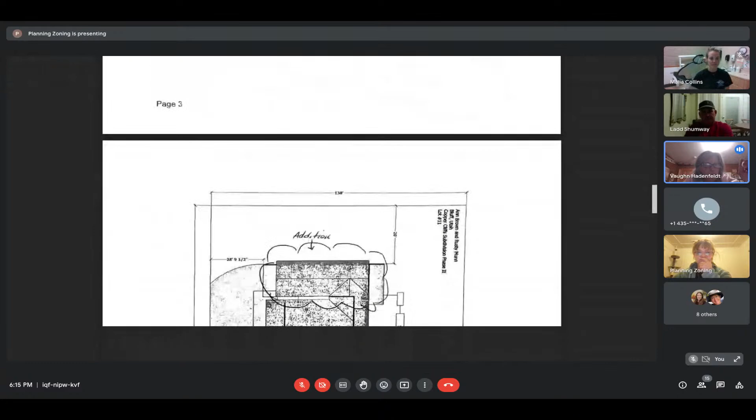Would you slide down to the drawing where the setbacks are? So there. Everything looks fine in terms of setbacks, except I'm confused by the double line of the outline of the property. Can you see that? It kind of looks like one was laid on top of the other.

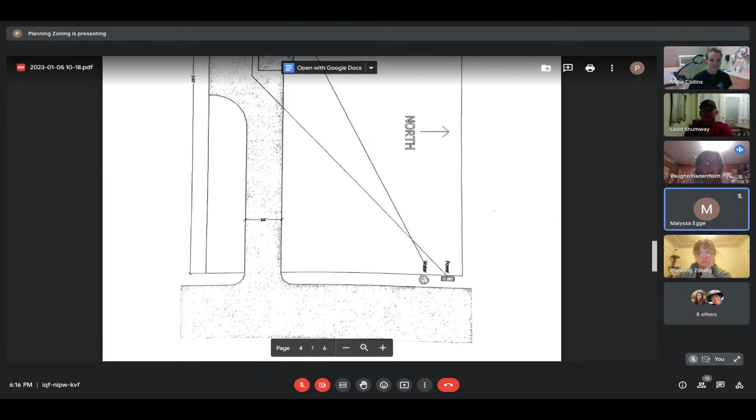Could you go down just a pinch, Amanda? Does it go all the way to the bottom? So Marcia, I'm wondering if those are just the measurement lines and not a double line of property. Are we looking at the same thing? I think so. Go up to.

You mean like this? Yeah, see how there's an overlap of the square? Am I looking at measurements or two drawings of the lot line? It just got confusing.

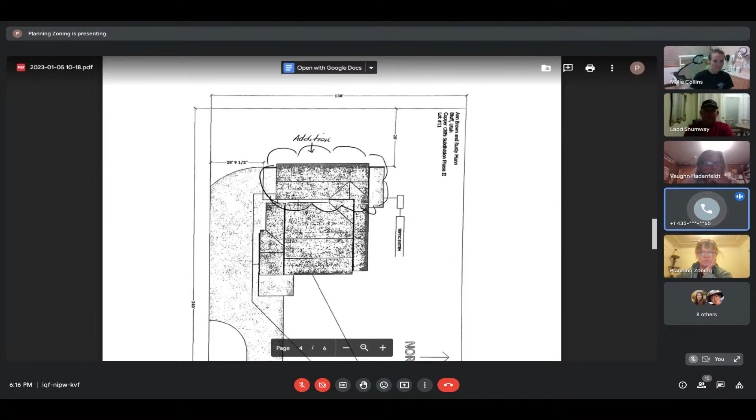It may be a line for measurements on that. The home sits within, on the south end, about 12 feet from where the existing home sits, and so it clears the property line there. On the west side, I'm within 20 feet from the property line. On the north side, we extend out 8 feet from the existing home, but we're still well within the 20 feet to the property line on the north.

Okay, yeah Marcia, I think those double lines are showing the measurements. Okay, like I said, I just got confused why one is sitting on top of the other. I do agree, Mr. Munson, that I believe you fit all the setbacks. I just got confused by the line. So we can move on.

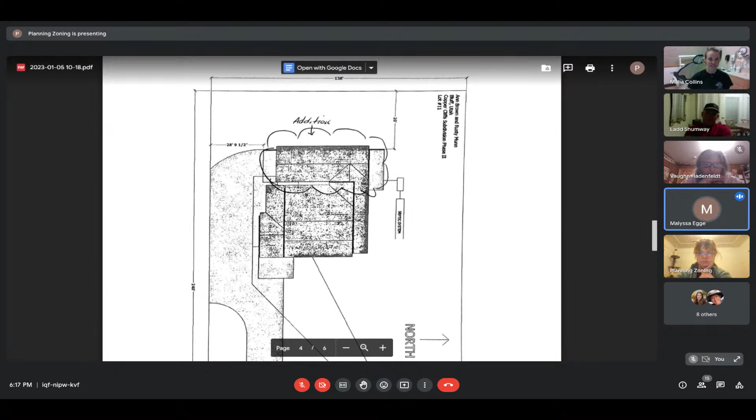May I just ask for clarity, Chair? Go ahead, Malyssa. Thanks, Mr. Munson, I know you do great work. I'm just curious, so the access to this, there's an original or existing single wide stall for a garage, it looks like. Is the access to the addition to the garage connected or not connected, can you describe that?

The two homes will be connected, coming off the bedroom of the existing home. The addition would hook on the west side of the home right there, and then extend into the den. As far as the garage, you would have access into the garage by a vehicle by going on the south side of the home, and then around into the garage that way.

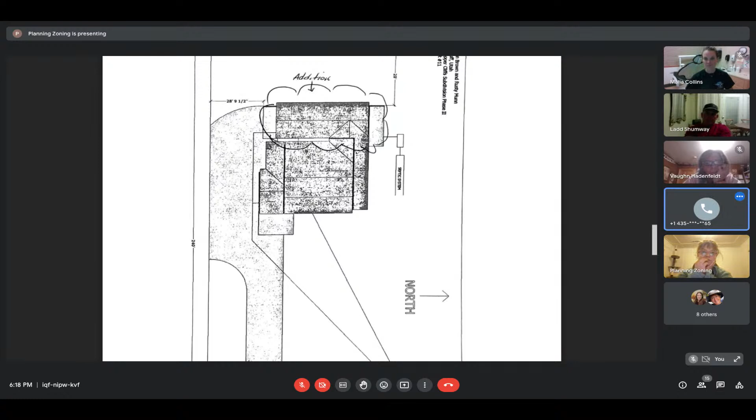Great, and just to double check, I know our setbacks only relate to the building placement on the lot, but it looks like in the drawing there's an opportunity for a vehicle to drive around the structure, maybe on the south side. So is that adequate for the vehicle to be moving in that space? Yes.

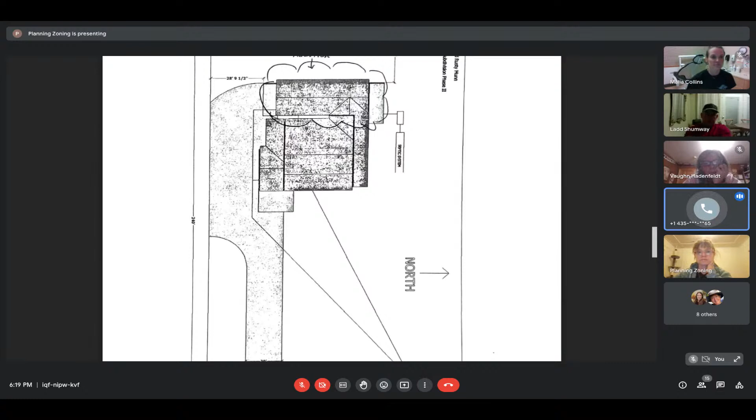What we'll do is enlarge the driveway on the south side of the home by about 6 feet, which will bring it over to the property line, and then take it back all the way to where you pull into the garage. So all of that will be parking area and also access into the garage. We also want to widen the road going up there by 6 feet from the main road, where you turn off going up to their place, and give them a little bit wider driveway. So you're widening it to the 20 feet listed there? Yes.

Anybody else have any questions or discussion?

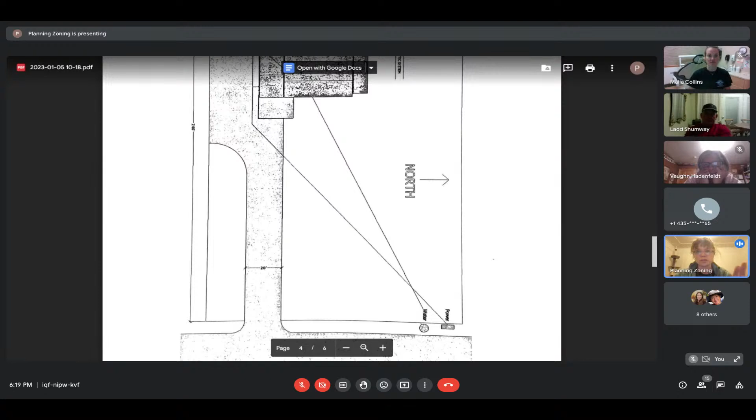Mr. Munson, I was just curious, we ask that any outdoor lighting be listed here and that it be compliant with the dark sky ordinance or outdoor lighting ordinance. Are you planning on installing any outdoor lighting on this addition? There will be some can lights underneath the awning, and the rest of the exterior lights will be according to the specs that Bluff has there to match the existing home that was already approved.

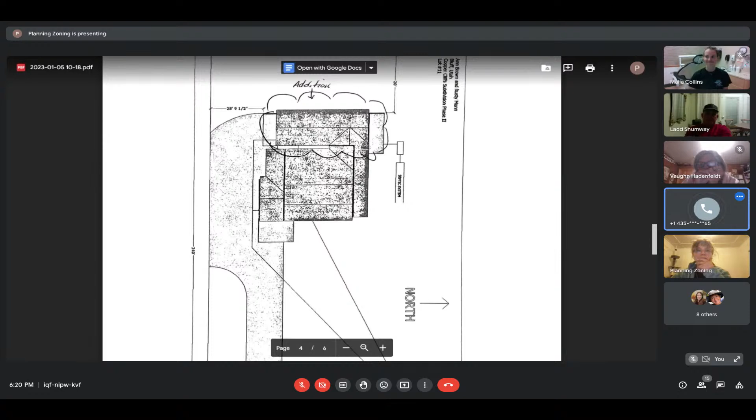Okay, alright, any further discussion from folks?

A motion to approve this land use clearance. Second. Okay, any discussion?

Okay, all in favor of approving the land use clearance for the Munn project, Brown Munn project, as shown, please say aye. Aye. Aye. Aye. Okay, motion approved unanimously.

So I will get a copy of this, let's see, I'll send it to you, Mr. Munson, and then you can get it to the property owners, and I'll also copy the appropriate people at San Juan County. I'm going to send that electronically. Do you need a paper copy as well?

Electronically would be fine, and I can print it off from there. Okay. All right. I will work on that tomorrow. So thank you. Okay. Okay.